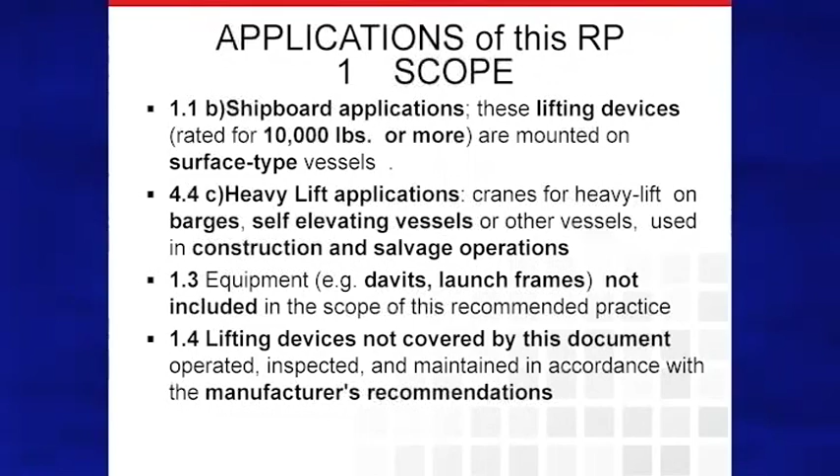We added something in there to kind of cover these actions. Lifting devices not covered by this document shall be operated, inspected, and maintained according to the manufacturer recommendations. A lot of these smaller lifting devices that people consider cranes, and we've got a definition for cranes...

They don't think you have to do an inspection on them. Well, everything needs some type of inspection. That's why the manufacturer documents are important.

We added a crane definition. There never has been a basic description of a crane. Some of the terminology was, well, it's not really a crane, it's a maintenance device. Well, a crane is any power-operated equipment that can hoist, lower, slew, or horizontally move a suspended load. So it's pretty well describing what a crane actually is.

Derate has always been in there, but we added some wording. Why do you derate something? To reduce the capacity because of damage or deterioration of a critical component. So there'd have to be a reason why you derate a crane.

So there was discussion during these years of trying to get this document in place, trying to figure out exactly when we get to words, what does it mean, why we have it in there. That's why a lot of the terms were added, but there were some descriptive terms added to it.

In service can be, as long as the crane is capable of operating in a safe manner, with the boom in the air or in the boom rest. Either way, it still can be in service. Out of service is when it's not capable of operating in a safe manner. It can be in the air or at rest, neither one, it could be either way.

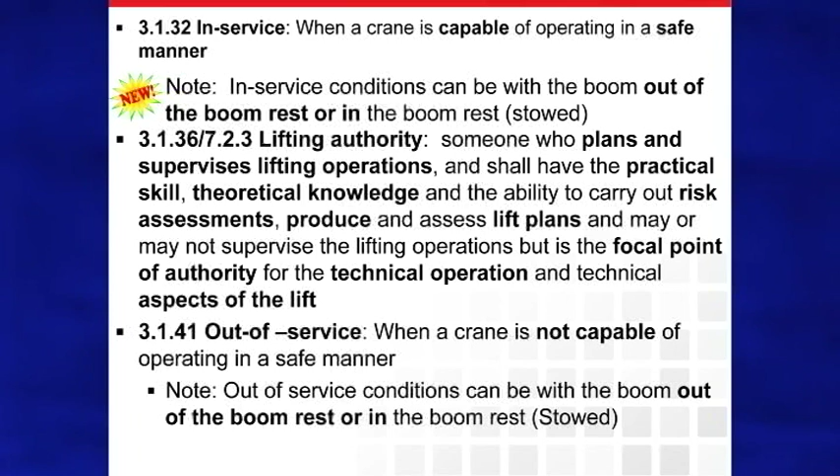Ed Zerang went through the lifting authority in his presentation, but I think it's a little bit more involved in lifting authority than people are going to realize. It's going to be a certificated person. A PIC appoints somebody as a lifting authority.

That doesn't mean that if there's an incident, who's going to determine what his qualifications are. I think there's going to be some specialized training involved in that lifting authority process. Like I say, it's in there for a reason, and I think it's going to be a boost as far as a lot of these lifts, having somebody on location, especially for the heavy lifts.

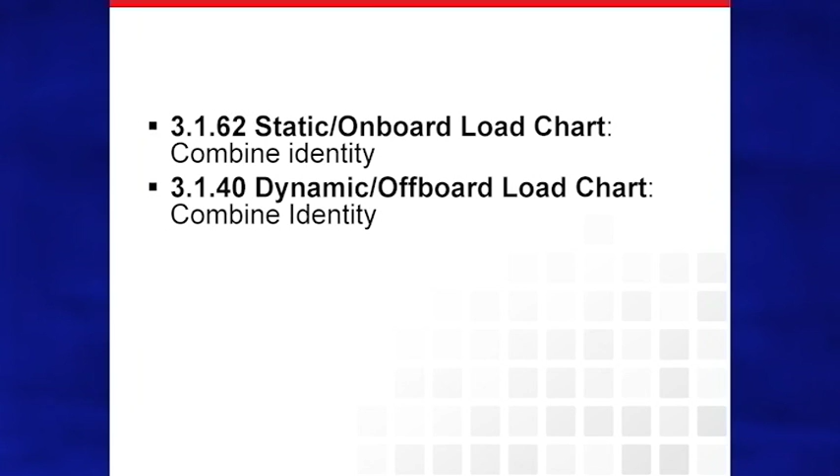Static and dynamic, all the older cranes all had static charts in them. What is it, '95, required to have a dynamic chart. Well, a lot of the old operators have some of the older cranes. Now they want onboard charts and offboard charts. Not really required until the 6th and 7th edition when you had floating vessels.

Static and dynamic is required on an older generation crane. So with that emphasis, we added static, onboard, dynamic, and offboard to kind of give us a guide. Basically, it's not always onboard and offboard that is required.

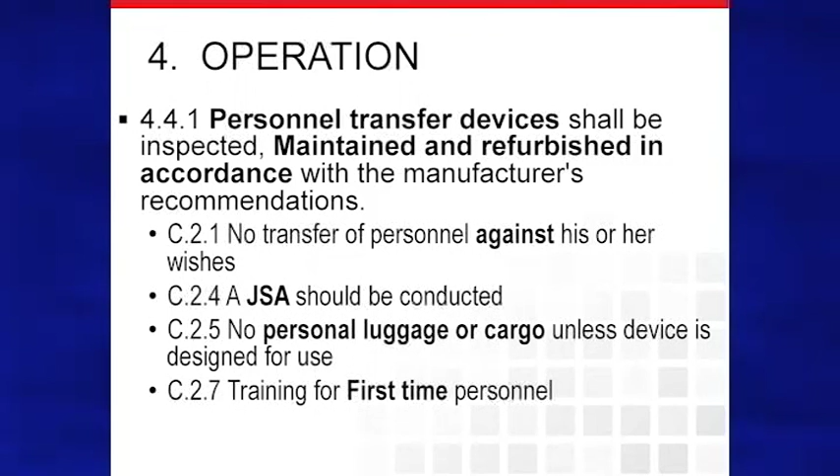C.2.4, a JSA should be conducted when doing any personnel lift. That was added basically to ensure that the person getting on that basket is on the JSA and aware of what's happening. Big topic: load test.

Presently, the only requirement by API is that it has to be on a new, relocated, or temporary crane. That's the only time a load test is required. The crane load test is not required to determine the fitness of repairs or alterations.

Some representatives that came to the meetings wanted a load test on any critical component that was replaced. Then the flag started coming up: okay, you're changing the dead end on a crane, it's a critical component, so now you have 400 cranes and you're going to do a load test on every one just because you changed the dead end. We kind of left that as, well, we're not going to go to that area.

That's up to the owner to determine if they want to do a load test. They own the crane, so they can make the call. But it's not required for a critical component.

We've had instances where you have a crane operator who's pretty sharp and knows that crane will not pass a load test. So you're sitting in the crane looking at a dyno, the operator's pulling a load, and you're trying to verify it'll hold the load. The operator is just holding the boom hoist control or the hoist control in because he knows the lift cylinder's leaking or the winch is slipping, so he can fool the inspector.

We added in there to make sure the lever's in the neutral position, just to make sure the crane will pass, not the operator passing the crane.

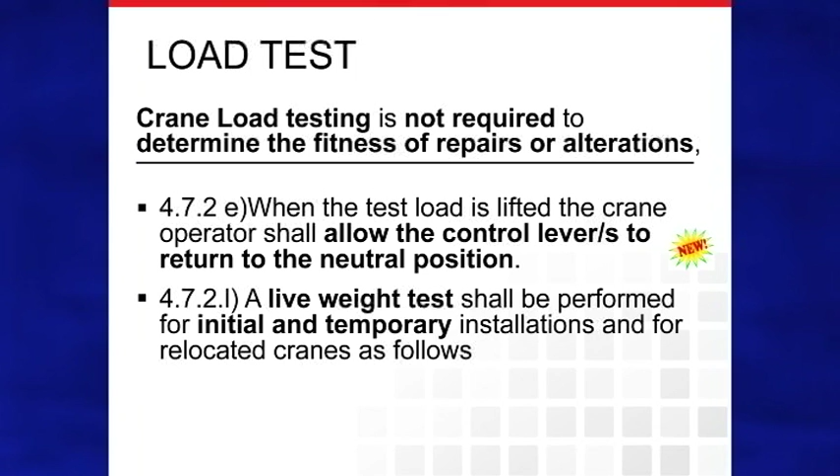On load testing, a live weight load test shall be performed on initial and temporary installations, basically water bags or steel weights, anything live weight, not deck pulling. The load should be swung in all directions that the crane is operated to avoid obstructions.

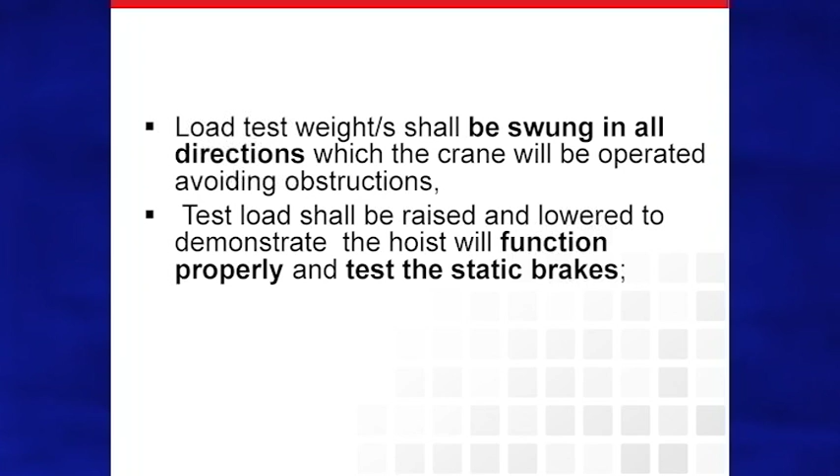Another portion is it shall be raised and lowered to demonstrate the hoist functions properly and to test the static brakes. If it can't handle the load, can't lower it, can't hoist it, can't hold the load once you go into neutral, it's not really going to pass the test.

Crane usage categories: for infrequent use, the only thing required is a pre-use and an annual inspection. Now, if it's sitting idle for more than 3 months, you have to do a monthly inspection, going through a complete full function test of the crane during that period.

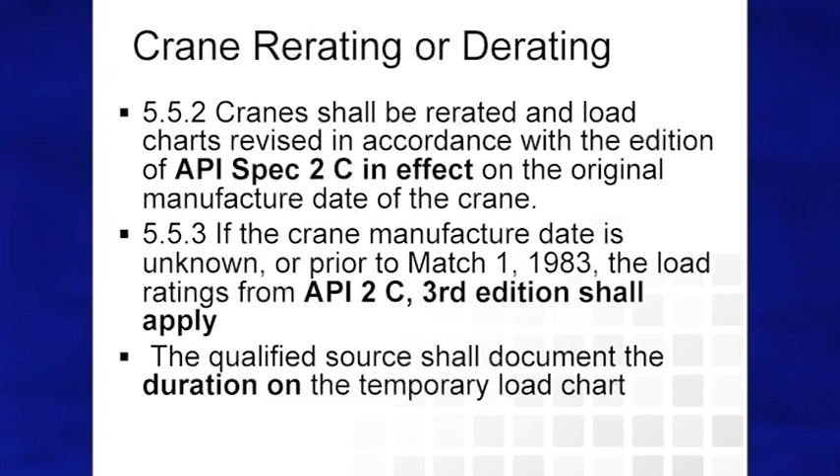Welding repairs: the crane shall be re-rated and load charts revised in accordance with the edition of API 2C in effect at the original equipment date of manufacture. So basically you don't have to go to the 7th edition for a crane you're doing repairs to. It just goes back to the edition it was designed or built to.

Whenever a derated load chart is put on a crane, it must be done by a qualified source, and there should be documentation of the duration of that chart, whether it's 30, 45, 90 days, whatever the period is, so you don't have a crane sitting there for a year with a derated load chart on it without knowing why it was derated or how long the chart is good for.

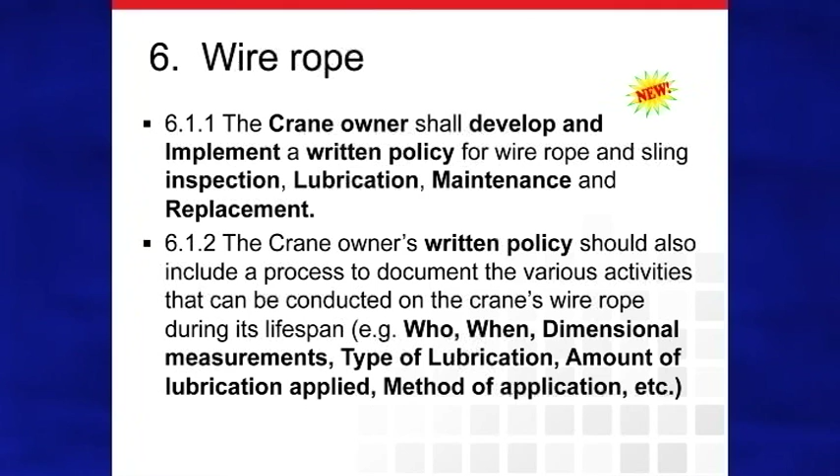What came out of it was that a crane owner shall develop and implement a written policy for wire rope and sling inspection, lubrication, maintenance, and replacement. That policy indicates who, when, the dimensional measurements, type and amount of lubrication, and the method of application. How is it being greased, how is it maintained?

Section 6 of the wire rope requirements also does not apply to rigging. The little anti-two-block cables that hold up the balls or weights are not required to have a certificate or a pull test or proof test on that sling. It's just a piece of equipment, not required to have that certificate on it.

But it shall be included as part of the periodic inspection program. A lot of people miss checking those little items, like the shackles and the cables. That's part of the inspection process.

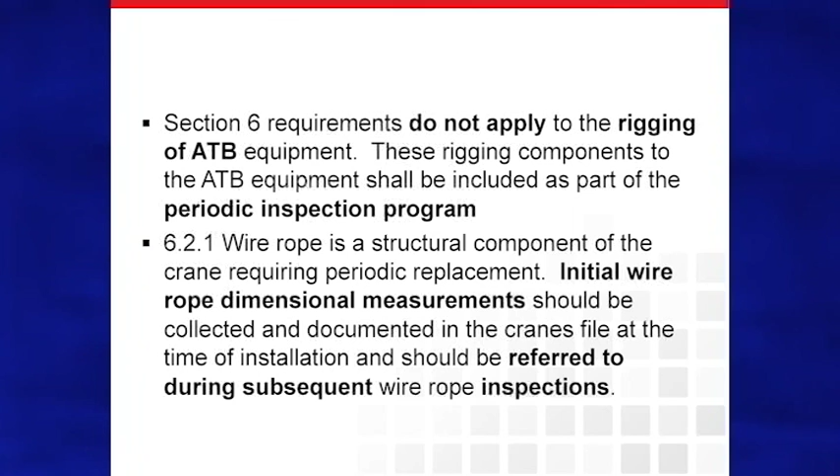Basically a baseline dimension: you put the wire on, work it a little bit, get a baseline dimension of that wire rope and document it. There's no nominal dimensions in this part for running rope or standing rope procedure. We don't measure 0.750, we measure the actual dimension and record that. No nominal dimensions — we took out Appendix D.

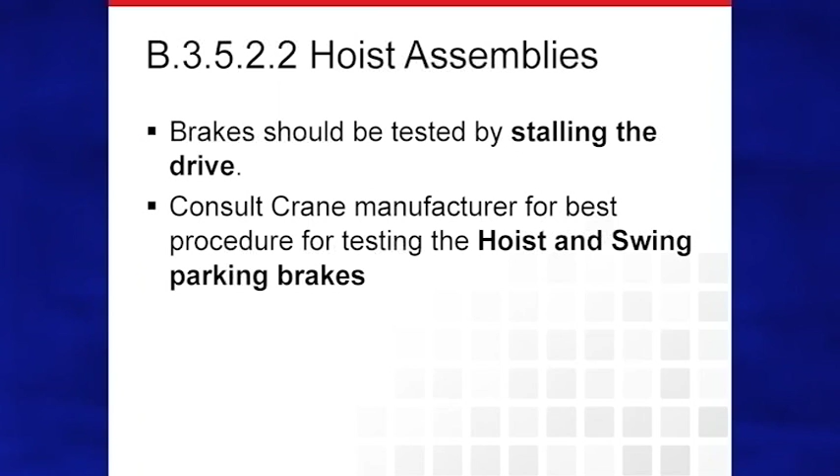Annex B covers hoist assemblies. Part of it was for stalling the hoist drive; we took that part out and added to consult the crane manufacturer for the best procedure for testing the hoist and the swing parking brakes. The swing brake was already in there before, but we added details on the swing brake, since a lot of people don't understand how to check a swing brake.

They want to swing it and hit the brake. Oh yeah, it works. But next time you're getting a wind, put the brake on and it doesn't hold. You have to actually power against a stalled brake to test it. It's the only way you can get a true test on the brake. If it tears up, it's junk. To test it properly, it has to be stalled out against that brake.

Some more on wire rope. We added high stranding to the terminology for high strand on wire rope. Basically, people understand that there's an issue with high stranding. That whole high strand is not actually working. It's a dead rope. All the dimensions on the wire rope for wear limitations all stay the same.

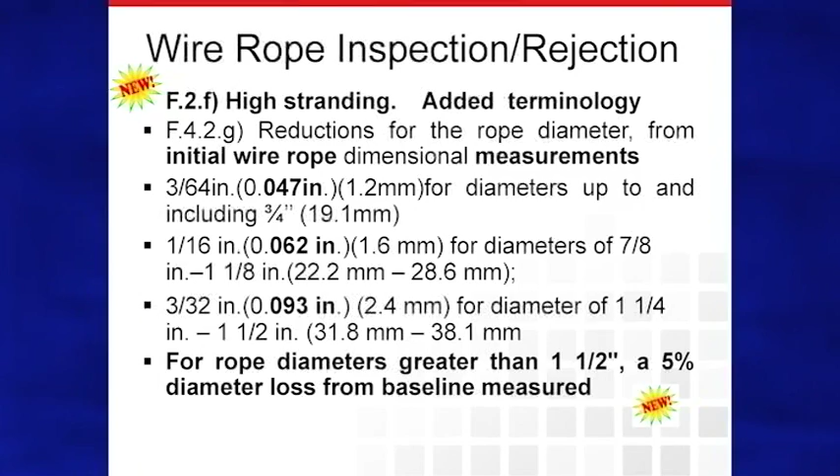The wire rope terminations in '95 changed it to where you don't have to saddle a dead horse anymore. Well, that was always our terminology — you don't saddle a dead horse. Well, it's back in now. Where all this part of it here, you can saddle a dead horse. You can do it either way. So that whole process, this wasn't in there before. We added that back in, so you can saddle a dead horse now.

Pre-use inspection — in the previous documents, I think the 5th and 6th edition both, item number 6 was to do a walk-around inspection. Most people set up their inspection criteria as far as pre-use according to the document, basically A, B, C, and D. We took the walk-around inspection and performed it up to the top, because most people, when they get on the crane, they're not getting back off to do a pre-use inspection and walk-around. So we thought that should be put up top, so that you do that pre-use first. That's the first thing you do before you get on the crane.

We also added in there to verify the operation of the boom hoist and anti-two-block. That wasn't in the pre-use inspection for years, it was in there for the quarterly inspection. So if you have an infrequent use category, less than 10 hours per month based on a quarterly average, it never was done until you did the annual. So in theory, it wasn't required to check the anti-two-block or the boom hoist kickout. We wanted it in there.

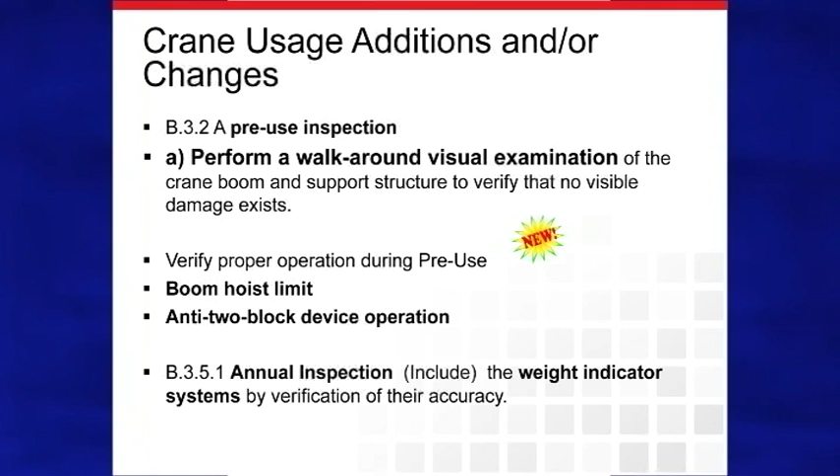We added in the annual inspection to include the weight indicator system for verification. It's not required per API that you have a load indicating system on a crane, but if you do have it, verify it — do the increments, basically 5, 10, 15, 20,000 pounds — and compare it with a calibrated dynamometer to make sure that load indicating system is working. I don't know anybody that's going to send in a Martin Decker unit every year to get it recalibrated. Basically, the only time they do it is if it starts leaking. Check it occasionally, make sure that the function is there, that it does operate in some manner, in increments.

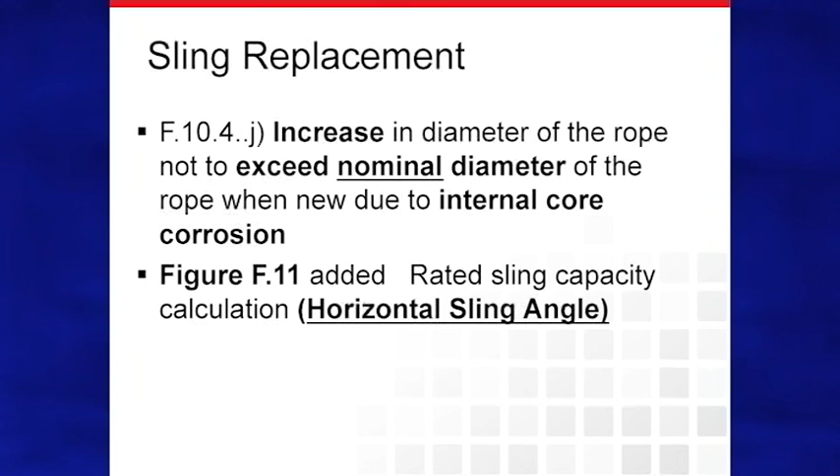Here's nominal diameter again. Nominal diameters did not show up on running ropes. The only time it's in the document is for slings, and that's just to verify if they have an increase in diameter — we back up on wire rope. There's no statement in there on running ropes that if the wire rope increases you have a warning sign. I think we still think people, as a qualified inspector, should have enough common sense to realize that when stuff starts getting bigger, something's not right. Whereas a sling, you can kind of bend it around — if it stays in one position, you know it's junk.

Yesterday, one of the guys from BSEE made a statement about ownership, and I think that's one of the biggest things — people do not take ownership anymore in the practice of operation, rigging, inspection. People just want to pencil-whip an inspection. The ownership part, I think, is the big thing I needed to bring up earlier but didn't. It's probably one of the things people should understand — ownership is an important part, that people understand they are responsible. Thank you.

Next up is David Landry, presenting on temporary cranes from API RP2D, covering changes from the 6th to the 7th edition. David is a crane foreman, employed with Fieldwood Energy LLC, and has been working in the offshore oil industry since 1975. We're going to talk about the changes between API RP2D 6th edition and 7th edition for temporary cranes.

Temporary crane installation. The temporary crane section has gained some major additions. Previously, this section was Appendix I, and it was a half a page long. This section is no longer an appendix. It is now chapter or section 9 of the RP2D 7th edition, and is now 5+ pages.

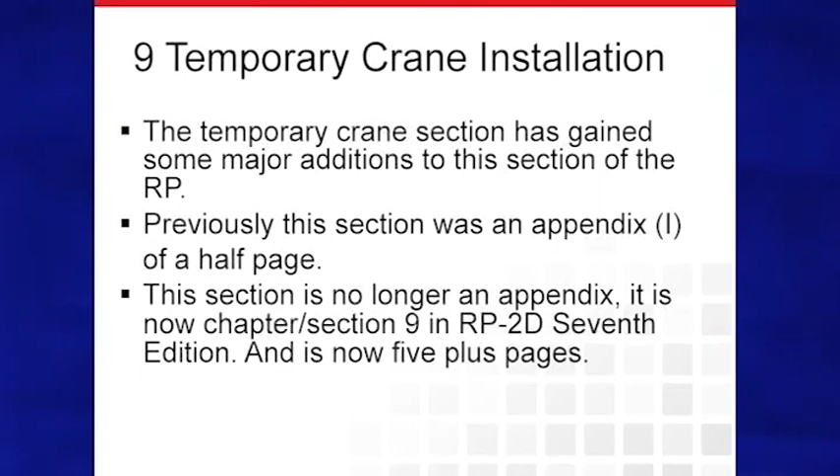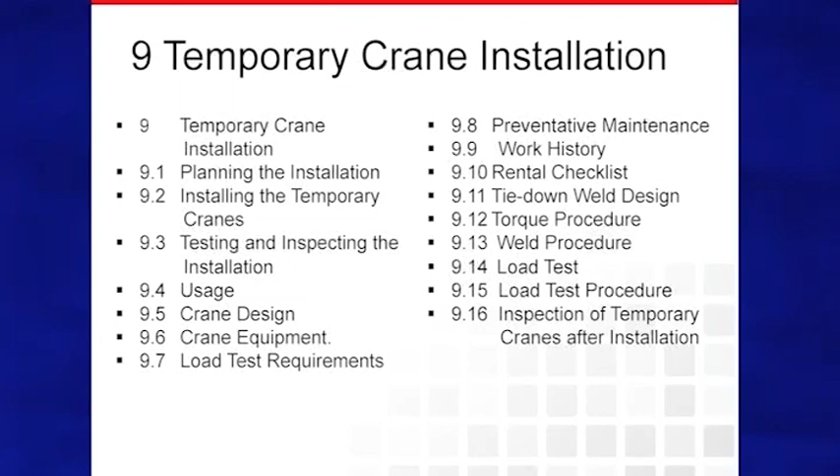All the sections in the temporary crane installation cover planning the installation, installing the temporary cranes, testing and inspecting the installation, usage, crane design, crane equipment, load test requirements, preventive maintenance, work history, rental checklist, tie-down weld design, torque procedure, load test procedures, and inspection of temporary cranes after installation.

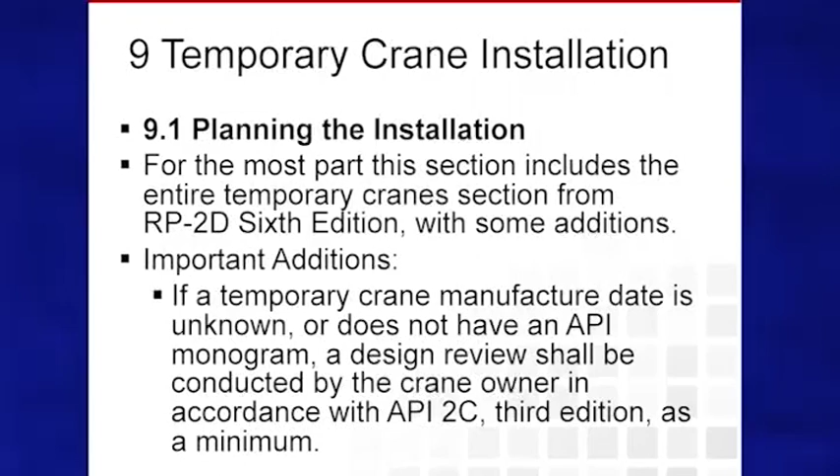Planning the installation. For the most part, this section includes the entire temporary crane section from RP2D 6th edition with some additions. An important addition: if the temporary crane manufacture date is unknown or does not have an API monogram, a design review shall be conducted by the crane owner in accordance with API 2C 3rd edition as a minimum. The qualified person shall ensure adequate review of the following: platform design and condition, selection of the temporary crane, planned crane placement on the platform, crane base beams and sub-base beams and tie-down design, meeting the safe working loads for the crane being installed, and critical components as defined in API 2C.

9.2 in the 7th edition has no changes from the 6th. It's virtually the same, no changes, and also 9.3 testing, inspection, installation.

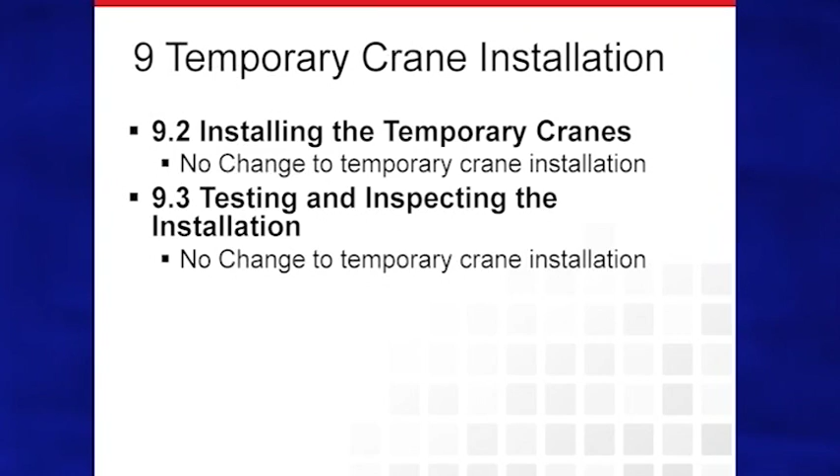The following are additions to the temporary crane section in RP2D 7th edition: usage and crane design. Temporary cranes are frequently used for construction, maintenance, and/or for installing equipment that the platform crane may be incapable of. They are not the permanent crane. Their fitness for purpose is more specifically identified by the task they are mobilized to address.

The load rating should meet the criteria as described in the edition of API 2C in effect on the original manufacture date of the temporary crane.

Crane design. The provider should submit, if requested, documentation of design parameters for the crane, including what the crane was designed and manufactured to. The crane pedestal substructure, base beams, and all crane tie-down connections should be designed in accordance with API 2A WSD. The provider should submit construction details for the substructure, base beam, substructure-to-base-beam connections, and base beam tie-down design for the crane, and certify that such design is performed by a qualified person and is specific to the setup of the proposed crane at the proposed platform.

Crane equipment. All cranes shall have anti-two-block devices on main and auxiliary lines. The crane shall be equipped with boom high-angle limiting devices. The crane shall have a load indicator.

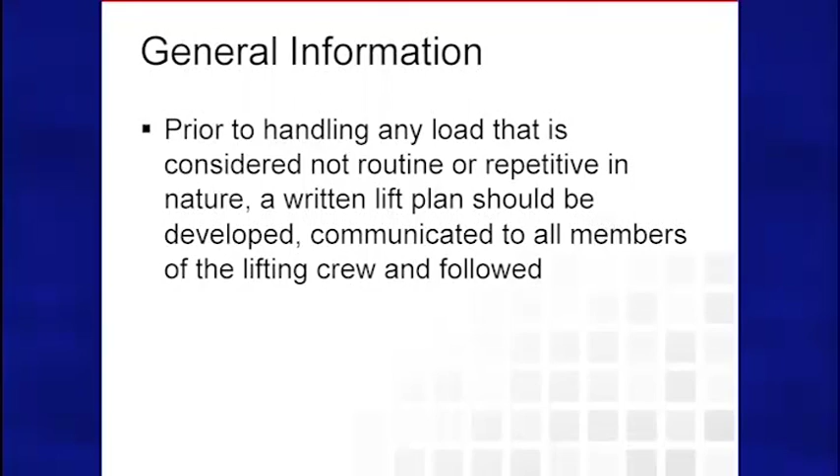It starts off here where prior to handling any load that's considered non-routine or repetitive in nature, a written lift plan should be developed, communicated to all members of the lifting crew, and followed. Hear the word communicated to all members.

We've seen that in rigger incidents and accidents - crane operator incident accidents. It's a team that takes the full responsibility, because the team has failed if one accident happens amongst the team. So think about the team concept as we go through this.

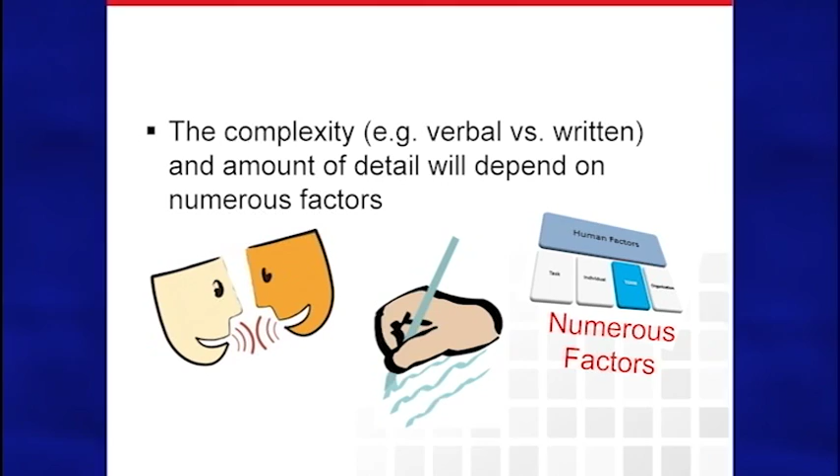The complexity, for example verbal versus written - the amount of detail will depend on numerous factors. And of course human factors is one of the big ones. What's that person's knowledge, experience? What is his demeanor, how he acts? Another thing we don't think about is that we are global - we can have language barriers, which could be a problem. So think about all the numerous factors here.

If a rigger's out there, he's the lowest man. He's looking up to the crane operator or people above for leadership. He's looking for help. We should be providing it to him and giving him the mentorship that he deserves to have, during the operation and after the operation. And don't forget, at any time during these operations, he has the power to do what? Stop, without any repercussion.

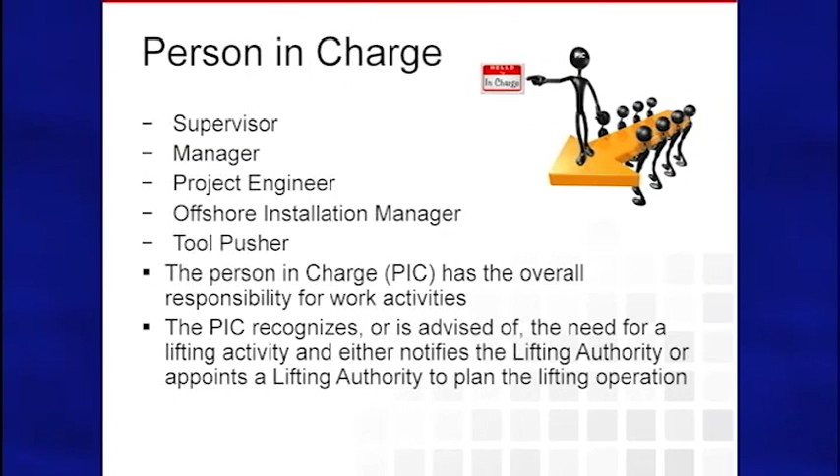Person in charge, who can it be? Well, supervisors, managers, offshore installation managers, tool pushers. But the person in charge has the overall responsibility of the work activities. The person recognizes or is advised of the need for a lifting activity, either notifies the lifting authority, which we're going to cover here in a few minutes, who that person is. He'll appoint the lifting authority to plan the lifting operation. So you see we're starting to get some kind of procedure or process here.

Here we're going to talk about the lifting authority, what his responsibility or what he should be doing. He supervises lifting operations. He should have practical skills, theoretical knowledge, ability to carry out risk assessment, produce and assess lift plans, conduct pre-lift meetings or toolbox talks.

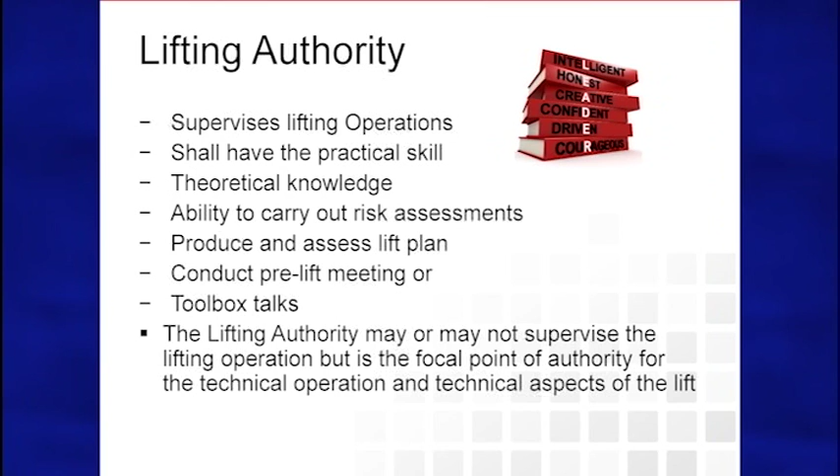The lifting authority may or may not supervise the lifting operation, but he's the focal point of the lift, the technical operation. He's the focal point.

Examples of the lift team could be tech support, giving you technical information to perform the lift, like put this sling right here on this pad eye and this pad eye. There might be specific areas you might have to attach to do a lift to keep it balanced. Crane operator, vessel captain, rigger.

To plan the lift, we got to take into consideration lift categorization, which I'll go into more detail as we go further. The lift categorization has to be determined: is it a heavy lift, or is it a simple lift? Is it complex? Is it critical?

Some people might look at personnel lift as being critical because it's involving personnel. We can hurt somebody. Risk assessments, training and competent personnel. Do we have trained and competent personnel to perform this task?

At some points, you got to provide training. And somebody's going to come in as an SSE, short service employee. When he comes in as an SSE, should we identify that person as not having knowledge? So maybe he might be an observer at this task, because we got to get him trained eventually. We got to get him up that ladder to be experienced.

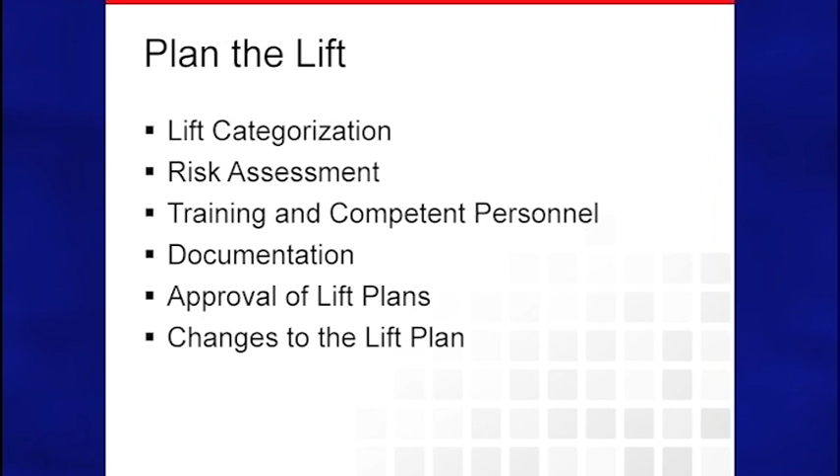Changes to the lift plan. Is he going to make any kind of changes to the lift plan? And sometimes if you make a change to the lift plan, it has to be done all over again, and it has to be communicated all over again.

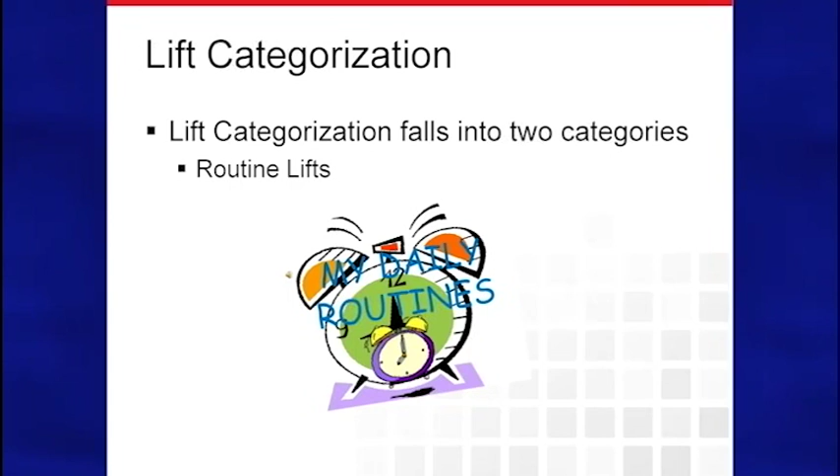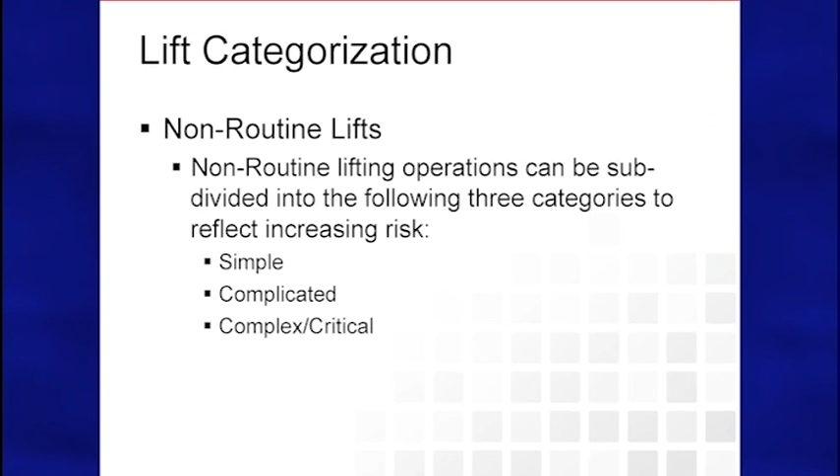Lift categorization is going to fall into two categories: routine lifts, and it's getting to the point where what is routine, and non-routine lifts. Non-routine lifts can be divided into three other categories: simple, complicated, complex, and critical. Each category requires a different level of documentation and control based on complexity and potential severity.

We're going to get to a section called Appendix G or Annex G, which in the back of API RP2D, will aid you or help you to identify different categories and these types of lifts.

You already might have a plan that categorizes, you might have different terminology. That's all right, it's acceptable, as long as it shows increased risk, increased documentation, and increased skills.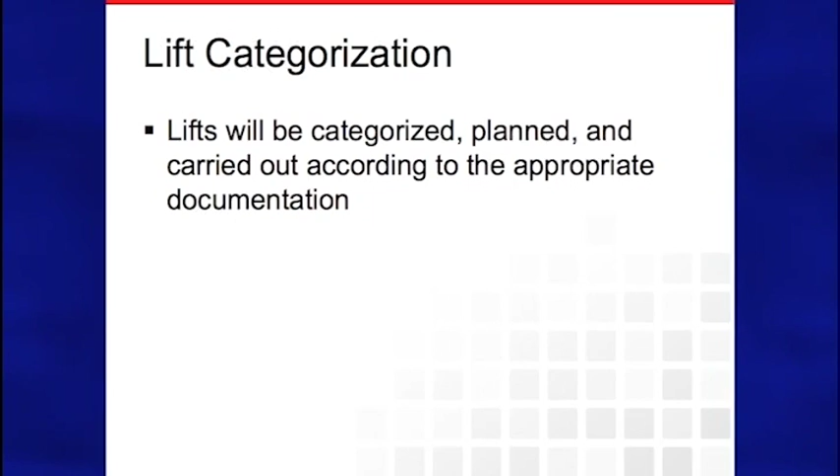The lift will be categorized, planned, and carried out according to appropriate documentation. Again, the documentation, like a permit to work, JSA, is required. This is what the Annex G I was talking about describes, some typical categories of lifting operation according to the level of risk and complexity.

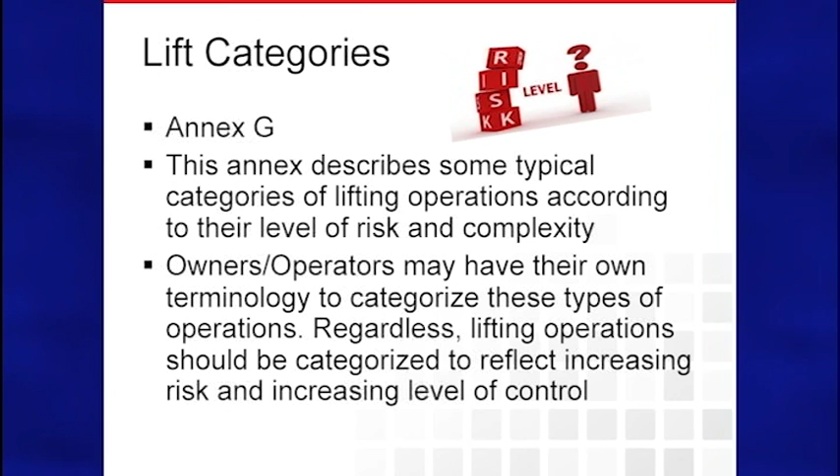The owners and operator may have their own terminology, as I mentioned earlier. That's fine, as long as it reflects increasing risk and increasing level of control.

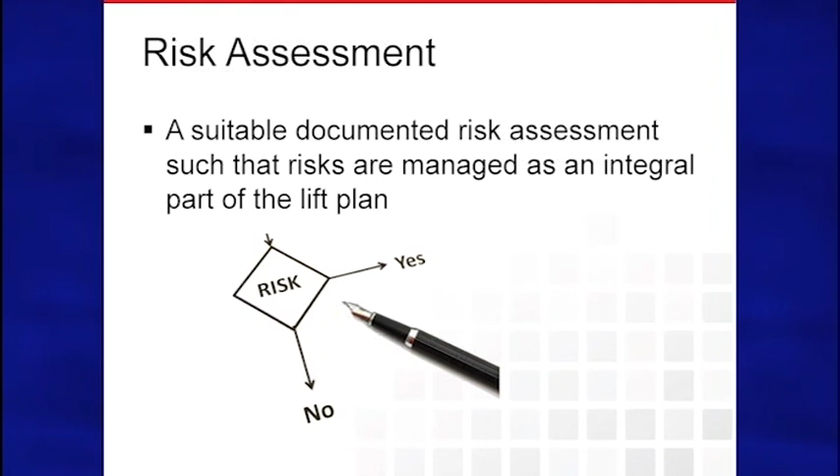Risk assessment: every lifting operation should be risk assessed by the lifting authority before work begins. The lifting authority should ensure that appropriate controls are in place for those hazards identified in the written assessment, such that risks are managed as an integral part of a lift plan. Remember, he's got to identify all the risks involved, right? Suitable risk documentation, risk assessment, such that risks are managed as an integral part of a lift plan.

A suitable documented risk assessment may already exist. You might have already developed a plan, and it's called generic, but that doesn't mean you just keep using the generic over and over again. It should be reevaluated for its applicability.

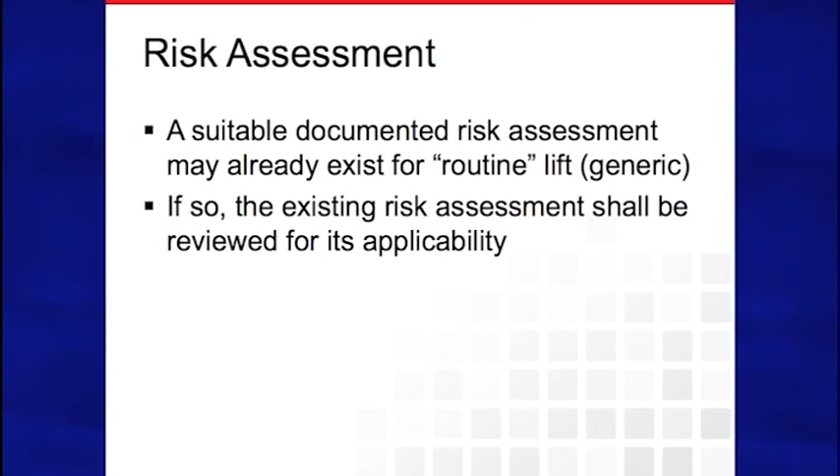You have to look at it and say, well, maybe the weather has changed. Maybe because I got a crew working over there, now I got to communicate with that crew, letting them know there's a lift path. That was mentioned earlier, wasn't it? Lift path is part of your lift plan. Are we going to be over any environmental concerns?

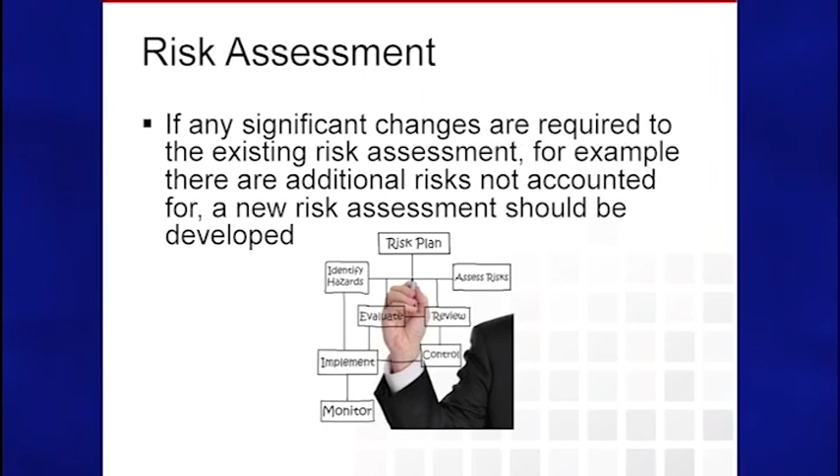Are we going to hit something, bump something? Are we lifting over personnel? If any significant changes are required to the existing assessment, for example there are additional risks not accounted for, a new risk assessment should be developed.

So if somebody might come out the blue and say, hey, we forgot this, then what do we got to do? Another risk lift plan assessment all over again.

This is a little example here: a crane operator while transferring personnel between vessels and vessels to the platform shall raise the personnel carrier only high enough off the deck to clear all obstructions. He's going to swing the personnel carrier over the water, raise and lower in such a manner to minimize swings, position it slightly above the landing, and gently lower to the deck.

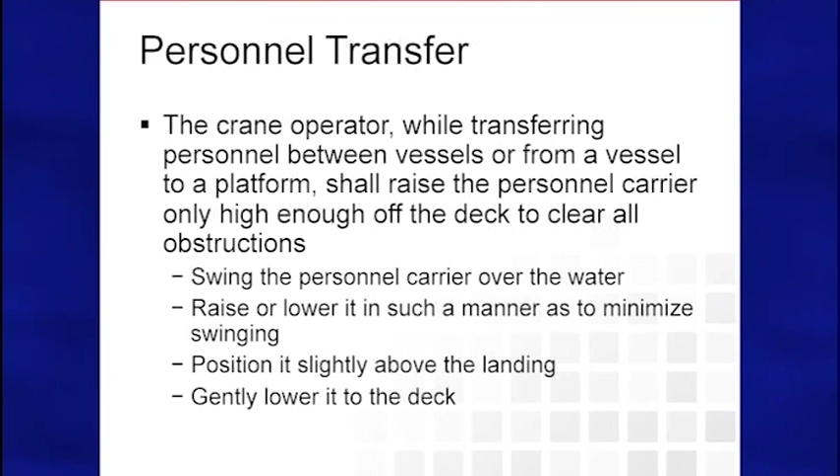Well, that's giving you some steps, huh? Can we add to that? Well, certainly, because your policy might have more to it. Regulatory might have more, whatever. The manufacturer might have something to add to that process. All this has to be put together to make your lift plan.

Owners and operators should identify the standards required for critical roles and process for establishing and verifying qualifications of those involved in planning and executing the lift operation. So we're looking at personnel qualification now.

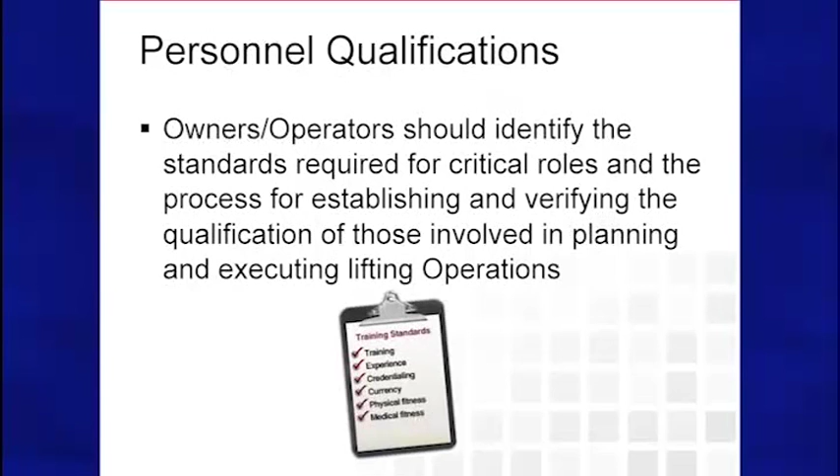Let's say that I fill out a logbook, I'm just picking that, okay? And I say, well, as long as he does 70% of it, that's good enough, we got a good understanding. But the other 30%, he has not performed yet. You better know what that 30% is, because if you put him on a task that's on that 30% that he's not performed yet, remember, he has not done it. And if something happens, that will come back to say he has not performed that task.

Personnel carriers should be designed and in conditions suitable for the intended purpose and maintained and inspected according to the manufacturer specifications. Also see Annex C, informative. That's, in other words, giving you more information for additional information on personnel transfer.

Qualified personnel to facilitate training, records should be readily available, if practical, on the person. That's a lot of documentation, huh? Only qualified personnel is involved in lifting operation. We got to train. He's an SSE.

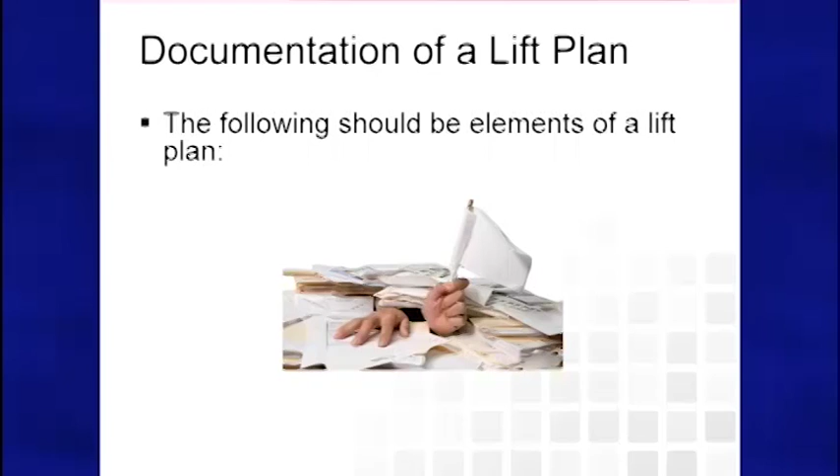Think about that, the following should be elements of a lift plan. You got to have a written plan, a lift plan, huh? You got to have a safety checklist. You know, what are you going to check off? Now, I didn't cover everything in the API RP2D, but there's a lot, 30, 40 items there to check through to see if everything is correct.

Remember, it's a team. I hope the crane operator is doing his job. I hope the PIC is doing his job. The lift plan, the rigger knows his job, because all of us is working as a unit.

Drawings, risk assessment, JSAs is all part of the lift planning. Drawings, like, you know, is there environmental considerations have to be taken into consideration when the load is going from one location, say point A to point Z? What environmental catastrophe can happen? Is there something we can hit or disrupt? Is there people in the way? Is the crane in working condition, huh?

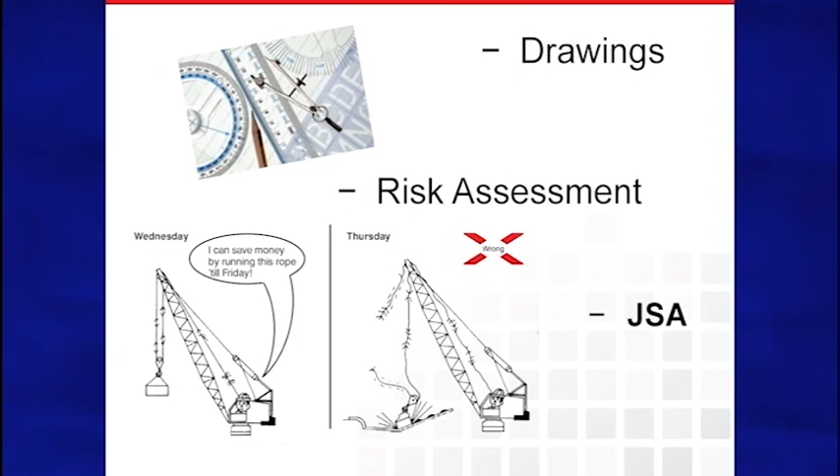Toolbox talk, communications, and permit to work. Toolbox talks, you can call it a safety meeting or whatever you want to call it there.

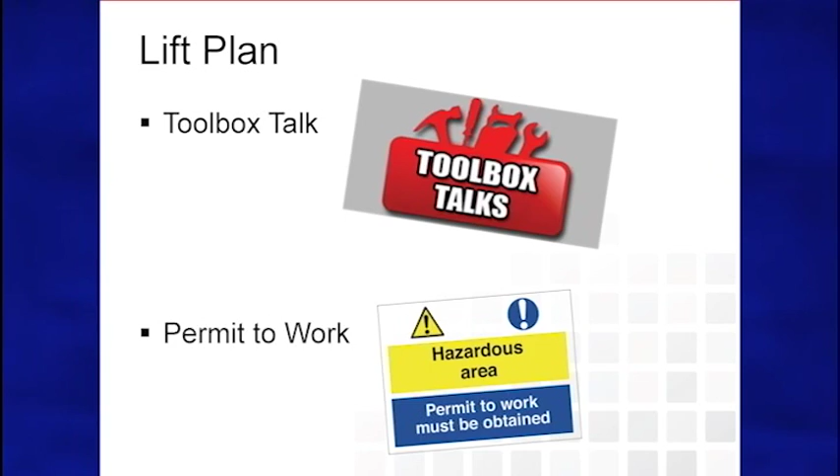All lift plans should be reviewed and approved by lifting authority. The rigor of the review should be determined by the category of the lift, which can require engineering specialists. So we're going to get approval or disapproval, and it might require more engineering input. Is there any changes to the plan? You know what changes do, it just kills us all. We don't like changes, nobody likes changes.

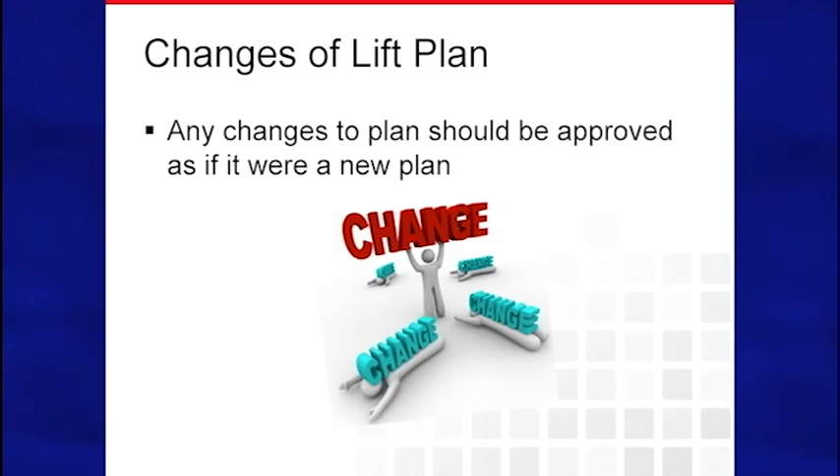Some questions you can ask: Is there a new existing plan which is adequate for the lifting operation? Has a risk assessment been undertaken and the risk managed through the control measures within the lift plan? Is equipment selected fit for purpose and identified in the lift plan? Do personnel selected to undertake this lifting operation have the correct level of experience and competency? Got to make sure of that.

Has the steps of the lift plan been communicated and understood by all involved? Again, the team—what could go wrong? Have you thought of everything? Have you conveyed that information? And has it been put into your lift plan?

What can go wrong? And if something goes wrong, do you have an emergency plan? Do you have an emergency escape route? All that goes into your lift plan.

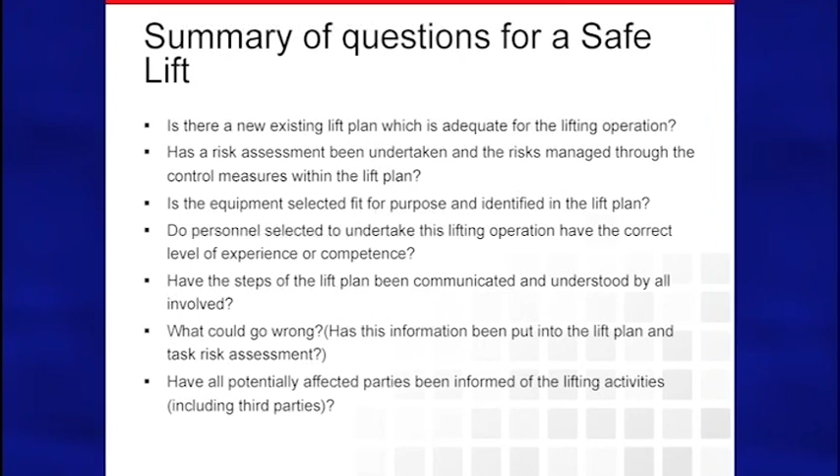Has all the potential affected parties been informed of the lifting activities? That means everybody. Because when you have a lot of activities going on, a lot of companies coming in doing jobs, they're all over the place like busy bees. Are we going to affect each other or get in the way of each other?

So you got to communicate all that to them. So in the end here, I like to say, we have too much to do to sit on the sideline. Let's do it together. We heard what we have to do. We've seen what we need to do. Now is the time to do it. And together we can do it. Remember, change and growth takes place when a person dares to become involved.

Thank you. Next up is Brandon Bollinger, speaking on the new API RP 2D training requirements. Brandon is president of Gulf Crane Services and has 25 years of professional experience in the offshore industry.

As everybody knows, the API 2D took about 5 years to write. The 7th edition from the 6th edition, we started it, and we had about 4 to 5 subcommittees, and I happened to end up taking over the training. So we're going to get straight into the slides.

The 6th edition has approximately 4 pages of training information and requirements. Currently, the 7th edition has 30-plus pages of information and training requirements. And that was a major difference, of course, and I'm going to break down some of those differences as we go.

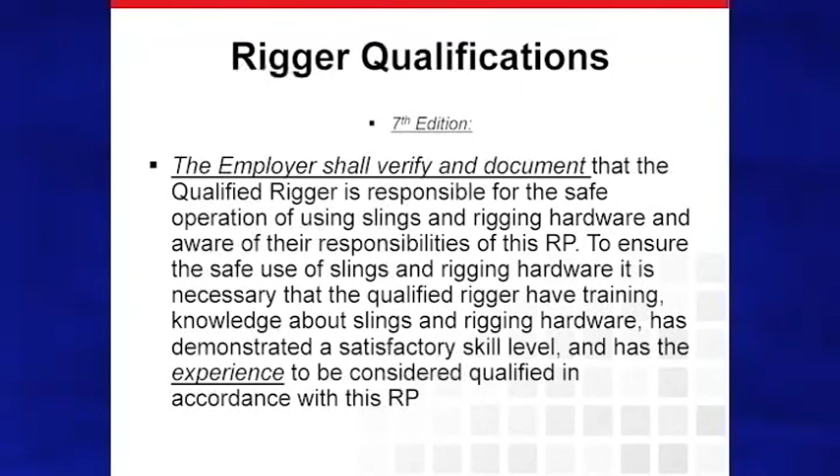Rigger qualifications: the employer shall verify and document the qualified rigger is responsible for the safe operation of using slings and rigging hardware and aware of their responsibilities of this RP. To ensure the safe use of slings and rigging hardware, it is necessary that the qualified rigger have training, knowledge about slings and rigging hardware, has demonstrated a satisfactory skill level, and has the experience to be considered qualified in accordance with this RP. These were some notables that stayed the same.

The crane load rigging shall only be performed by a qualified rigger. The employer shall ensure that rigger qualifications are maintained a minimum of every 4 years. We did discuss that in deep detail—could we do a 2-year refresher? We stayed with the 4 years on that issue.

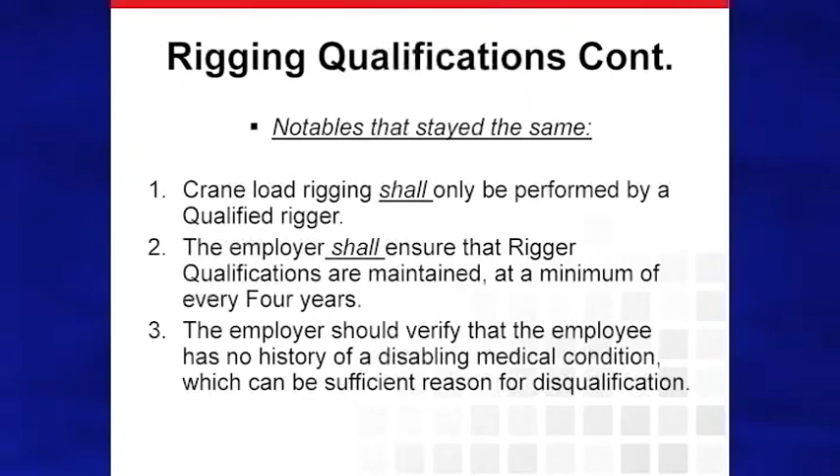The employer should verify that the employee has no history of disabling medical condition, which can be sufficient reason for disqualification. A lot of issues around that as well, and of course we left that up to the employer to be responsible for. That's not something the training company had to do, but the employer had to be responsible for that. Rigger training assessment.

The rigger hands-on assessment is added to ensure the competence and qualification of the employee, going from 1 page of requirements to 14.

Where we saw the biggest issue, of course, was we only had 3 pages, so there wasn't a lot to go by, and there were many people involved in this, Ed Zerang and several others who had been even working on the IADC, and so they had kind of started tasks, and I'm going to show y'all some of those here in the slides to come. So the rigger ended up having tasks that we added in, and I gave an idea of what the tasks looked like.

Task 1, pre-lifting hardware and sling inspection. Wire rope slings, complete inspection, 5 steps. Synthetic slings, 5 steps. Shackles, complete inspection, 5 steps. Hook complete inspection. Load block complete inspection. This has changed from the 6th edition due to each step being a pass or fail checklist, and this is in the 7th edition.

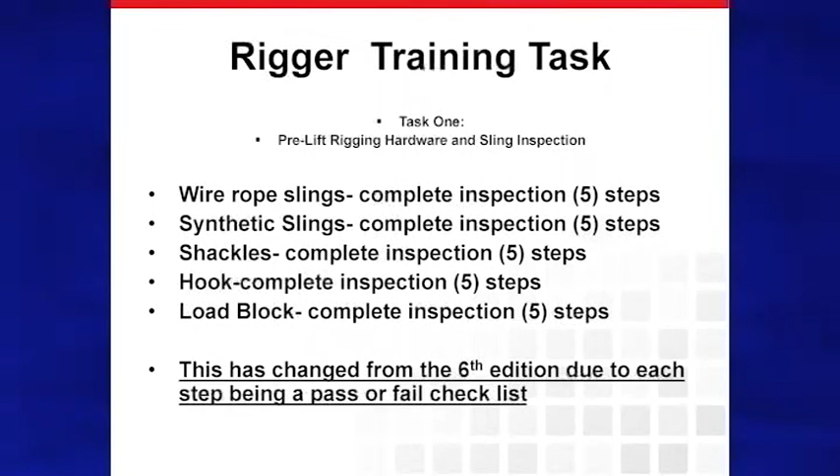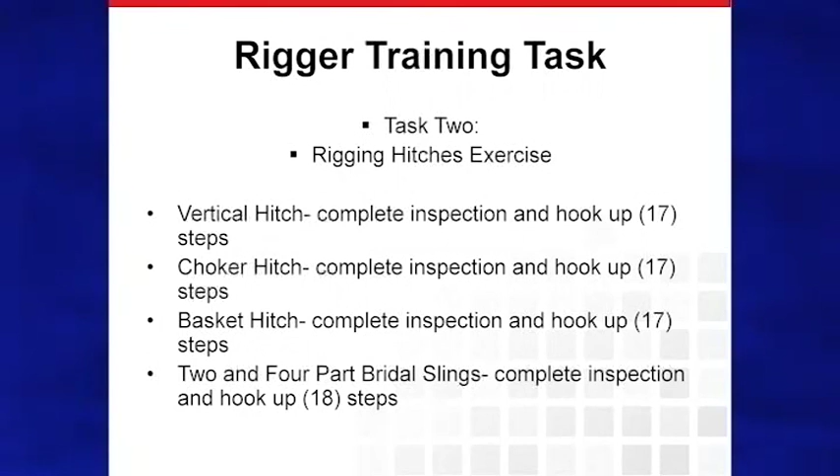Task 3: there's a lot of discussion around how the rigger communicates to the crane operator. We talked about hand signals, radio optional. We had looked at even making radio something that was required, but we left it optional. The designated signal person shall have the opportunity at the start of this task to discuss any special hand signals. One thing we also did—if there was not a boom retract or scope in or out that had been taken out, we added that back into the hand signals.

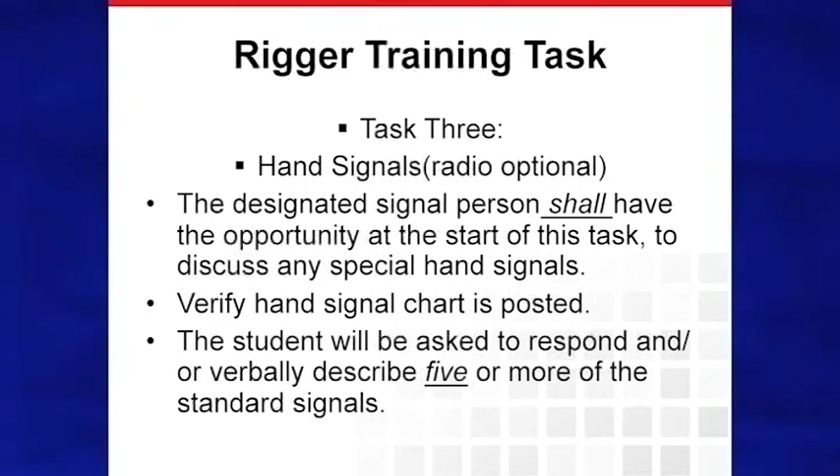Verify the hand signal chart is posted—again, that's supposed to be posted on the crane. The student will be asked to respond or verbally describe 5 or more of these standard signals. That was some kind of a minimum.

There were some questions about the certificate, because we mentioned certificate and card but did not put a copy of the certificate or show what it should look like. But if you take the same content that would be on the card, you could make a certificate the same way. So we did mention that in 2D, but we did not show an example of the certificate, just the card, in case that was a question for somebody.

Now, crane operator training, definition of a qualified crane operator. A qualified crane operator is one who is so designated by the employer, who has appropriate offshore experience and training. Such appropriate experience and training must comprise minimum amounts of classroom type and field training on cranes specific to the types of crane to be operated by the qualified operator.

I'm going to show you a couple slides that talk about different types of cranes. It was mentioned in some of the older editions, mentioning mechanical cranes and electrical cranes, but it was never specific that you had to be trained on the type of crane. So we did change that as well in the 7th edition from the 6th.

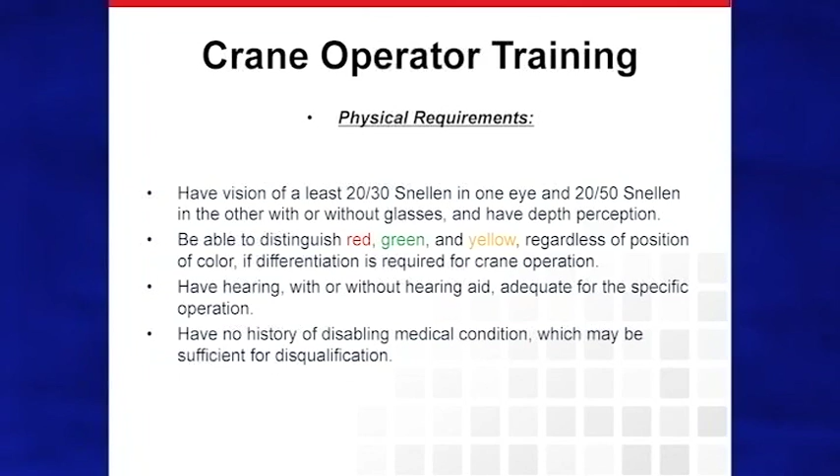We also added, which I'll show you when we get to the card, whether they need eyeglasses to be able to operate, because we felt like that was kind of being slipped by - we didn't know if a guy needed eyeglasses or not.

There was a lot of discussion around how do you check, how do you verify that all these physical requirements are met. Again, it's up to the employer to verify that this is done. It's up to the operator to have something in place to verify that the employer is doing the physical requirements. A lot of discussion around that.

Notice it stayed the same: no one other than a qualified operator should operate the crane. The employer shall assure the crane operator qualifications are maintained at a minimum of 4 years through requalification, and this shall also include current vision and medical.

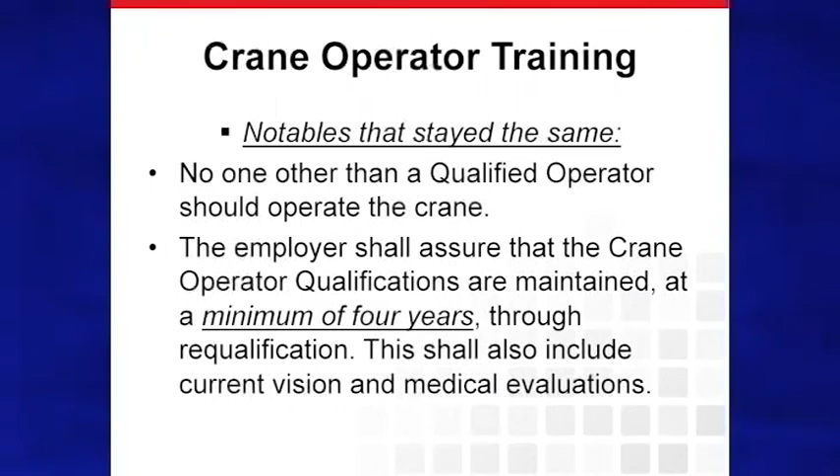Again, like the rigger, we had several people pitch whether we should go to 2-year requalifications on crane operators or riggers. The group decided that we were going to stay at 4 years, meaning that if you go through crane operator training, you have to get it done every 4 years.

According to 2D, crane operator training on types of crane - this RP shall be followed to qualify a crane operator for either 2 crane types and/or subtypes. Operation of a non-mechanical crane, which we considered hydraulic or electric. Hands-on proficiency is the last segment of crane operator training; it should be held on a similar type of crane to be operated.

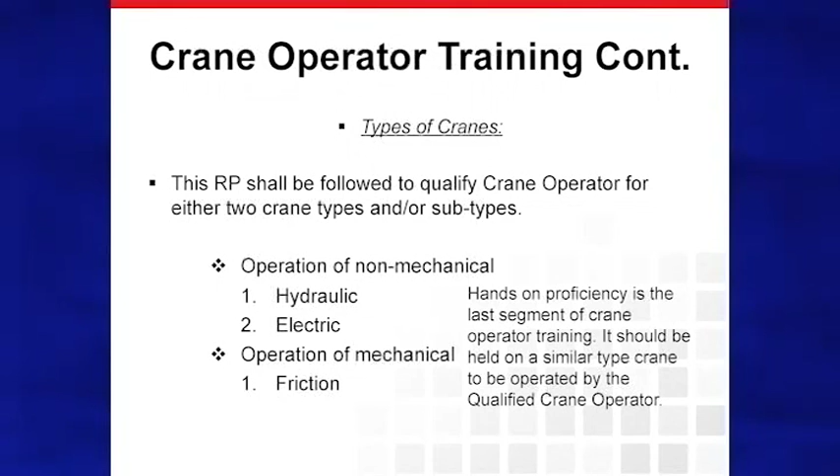The other type of crane was a mechanical or friction crane. There are still several friction cranes in the Gulf of Mexico, so it had to be specific to the type, whether it be a Manitowoc, a Link-Belt, or a unit crane. Same with the electrical, you had to be specific. So this was a lot of question around how are you going to do that.

Well, you can't train on the crane if you don't have that crane to be able to do the hands-on. So that gets a little difficult in a company that may just have a hydraulic crane trying to do electrical crane training.

You're going to have to be specific to the type of crane. So crane operator training continues with mechanical or non-mechanical cranes to be operated. Necessary experience and training shall be focused on each type of crane, and shall be more intense for mechanical than non-mechanical.

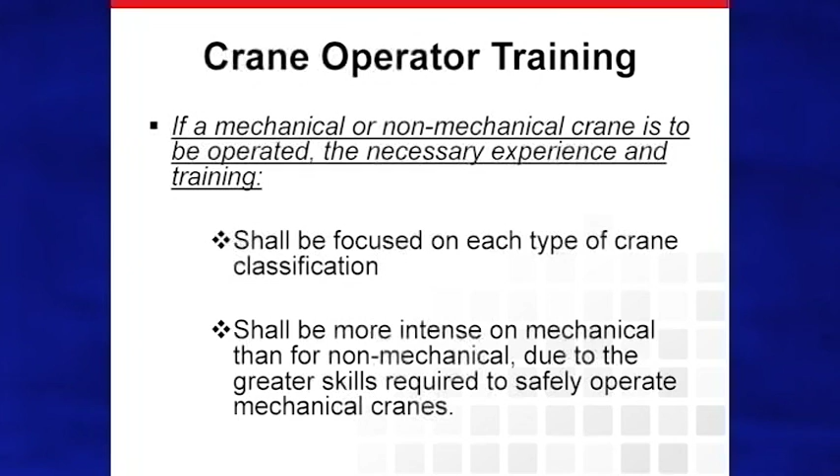Due to the greater skills required to safely operate mechanical cranes. We've seen accidents in the past tied to people operating mechanical cranes with friction, swings, clutches, and a lot of those cranes have been replaced. But there are still a good many Link-Belts and unit cranes, and Manitowocs out there that we're aware of. So pre-use and training shall document and ensure practical exercises include pre-use inspection, swing the crane and control the load, performance of at least 3 unique types of lifts.

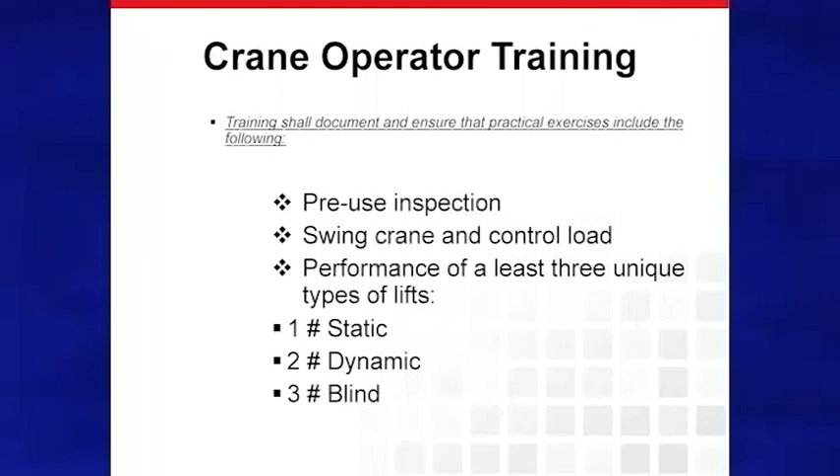There was a lot of discussion around this, that they had to perform a static lift, a dynamic lift, and a blind lift. Now, questions on that - if you're not on a floating vessel, how do you do a dynamic lift? We were specific that you needed to be able to understand that on the load chart. There could be a lot of questions about why we put it in there. Well, because you need to understand the difference between a static, a dynamic, and a blind lift. Blind lift is very simple, but there were a lot of questions around that. It is portrayed to mean that you have a way during the class to differentiate the two types, static and dynamic, meaning onboard or offboard as well.

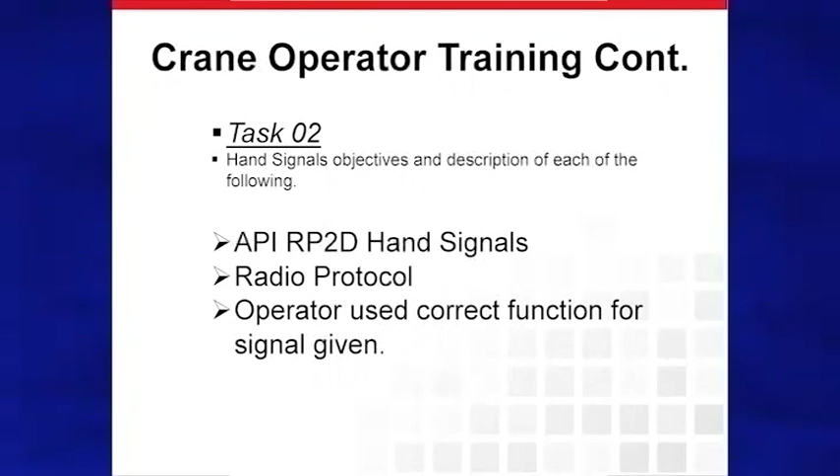So the same thing - Task 1 on crane operator training. This task should be completed in order to pass. Any student not performing this portion of the test constitutes failure of the course. Each student will do a full walk around the crane, checking for deficiencies. Task 2 talks about hand signals and radio protocol - operator uses correct function for signal given. Again, we didn't list all the tasks, I just gave you a few examples of what the tasks were.

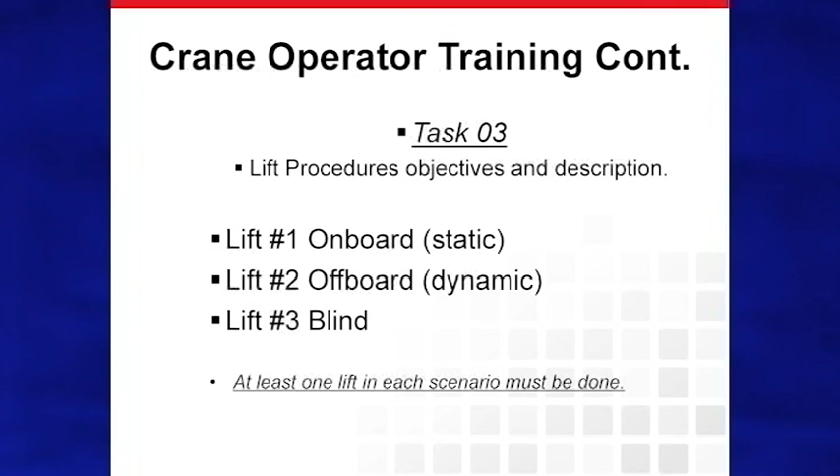Task 3, just like I talked about earlier - do you know the difference between an onboard static lift, or an offboard dynamic lift? And then they would actually perform a blind lift. At least one lift in each scenario must be done, meaning they would have to know how to use the load chart to do it, or perform a blind lift.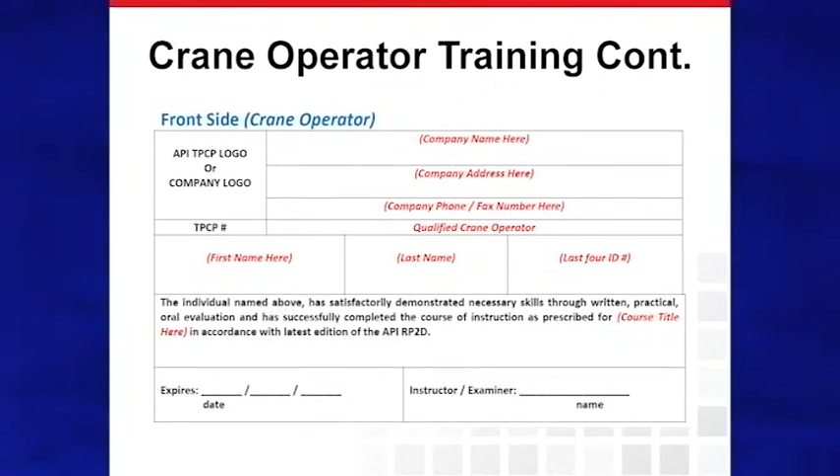So here's the front side of the crane operator card. Again, it was just the company logo in the left-hand corner - that was a misprint on that, so it'll just be company logo and this information. There's the back side of the card. As you can see, we wrote no history of disabling medical condition - they would actually have to check that off, and any corrective lens required. So that was another deal.

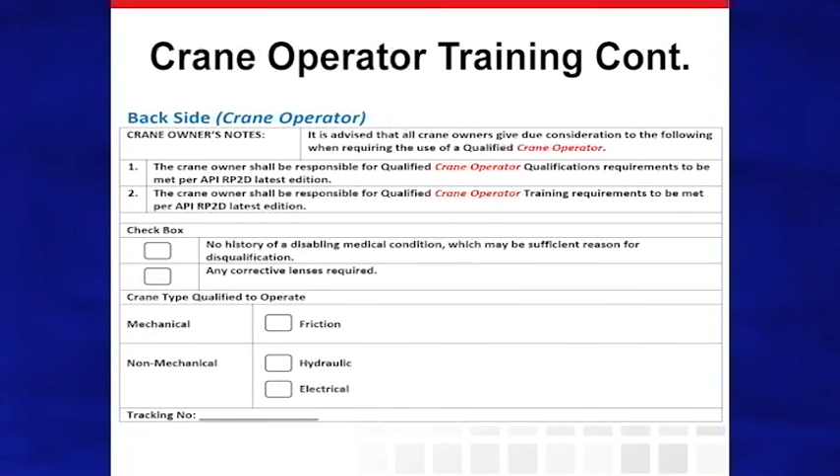And then the type of crane you're qualified to operate, you would either be friction, which is mechanical, or non-mechanical, hydraulic or electrical. And we put a tracking number in case somebody wanted to track it. Inspector training.

Inspector training was another major piece of the puzzle because it was very short, probably a 1 page section in the 6th edition compared to what should be covered in the 7th edition. We got into a lot more detail on the qualified crane inspector, just like we did on the rigger and the crane operator. A qualified inspector is one who is designated by the employer who, by reason of appropriate experience and training, has successfully completed classroom type training on crane maintenance and troubleshooting, on hoist troubleshooting and overhaul, and on the structural aspects of offshore cranes, which gives knowledge of structurally critical components and critical inspection areas.

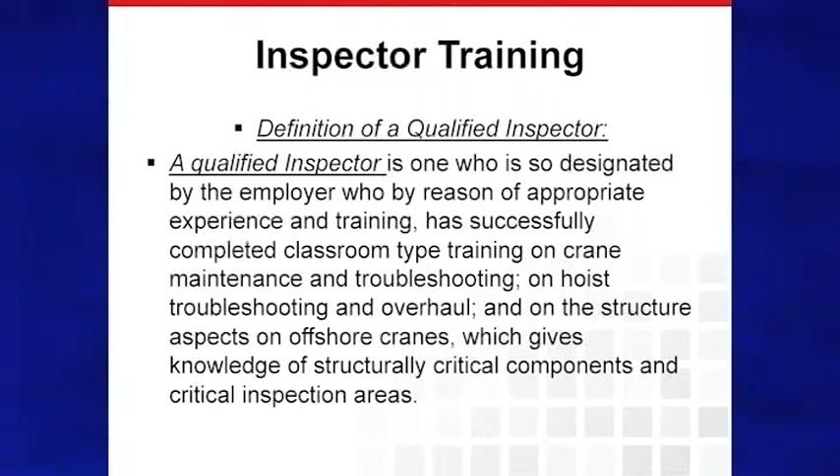Very heated topic, inspector qualifications. It is not a requirement for a qualified inspector to be a qualified operator. The 5th and 6th edition had this in it. We had several people who wanted to change that so the qualified inspector had to be a qualified crane operator, and the group decided we would leave it that a qualified inspector does not have to be a qualified crane operator. However, the qualified inspector cannot sit in the seat of the crane or operate the crane. So there are several drilling companies that were very adamant that they have qualified inspectors that they put a crane operator with to operate the crane while they're doing their inspections. So we left that alone - very heated topic, but we also left it that you didn't have to be a crane operator to be a crane inspector.

So it is recommended that the training elements for the inspector training program be tailored to the particular crane type in which the inspector is qualified.

Same deal if you're going to be operating or inspecting a mechanical crane, you should be trained on a mechanical crane. If you're going to be inspecting a hydraulic crane, you should be trained on a hydraulic crane. If you're going to be inspecting an electrical crane, you should be trained specifically on an electrical crane. That's a major change from before, because if somebody went through a qualified crane inspector course per the 6th edition, it covered all types of cranes according to API.

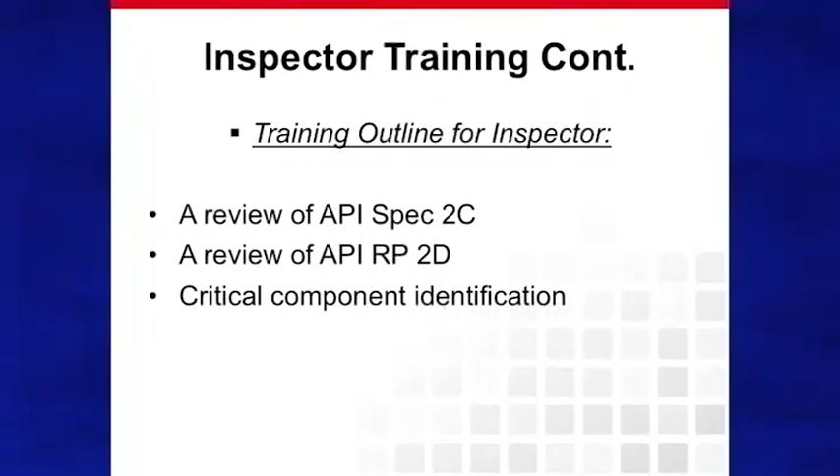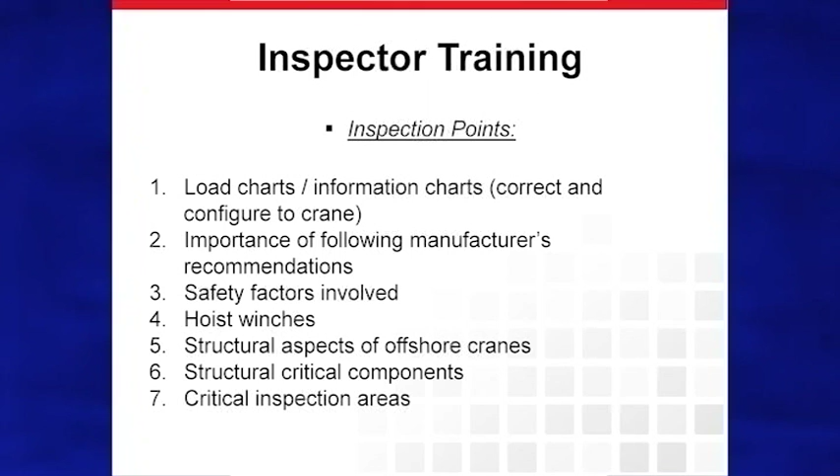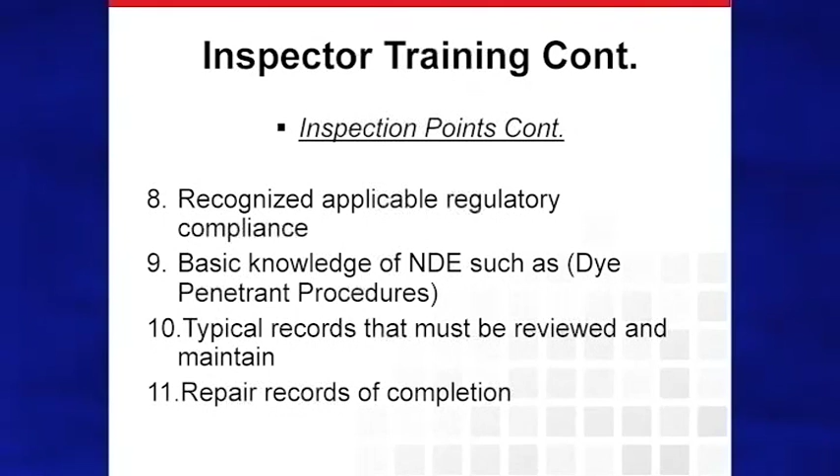Critical component identification, load charts and information charts, checking them to make sure they're configured to the crane correctly. Importance of following manufacturer's recommendations, safety factors, hoist winches, structural aspects of offshore cranes, structural critical components, and critical inspection areas. Recognizing applicable regulatory compliance, basic knowledge of NDE, typical records that must be reviewed and maintained, and repair records of completion.

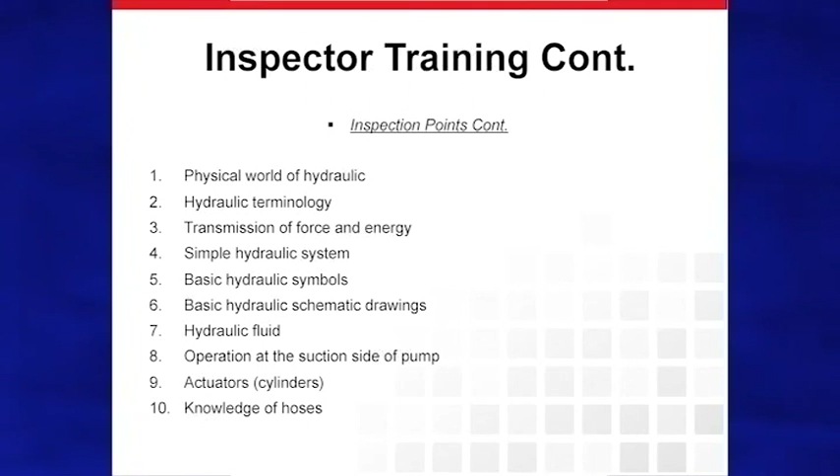The physical world of hydraulics: hydraulic terminology, transmission of force and energy, simple hydraulic systems, basic hydraulic symbols, basic hydraulic schematic drawings, hydraulic fluid operation at the suction side of the pump, actuators, and knowledge of hoses. Again, this is all added information that was not in the 6th edition.

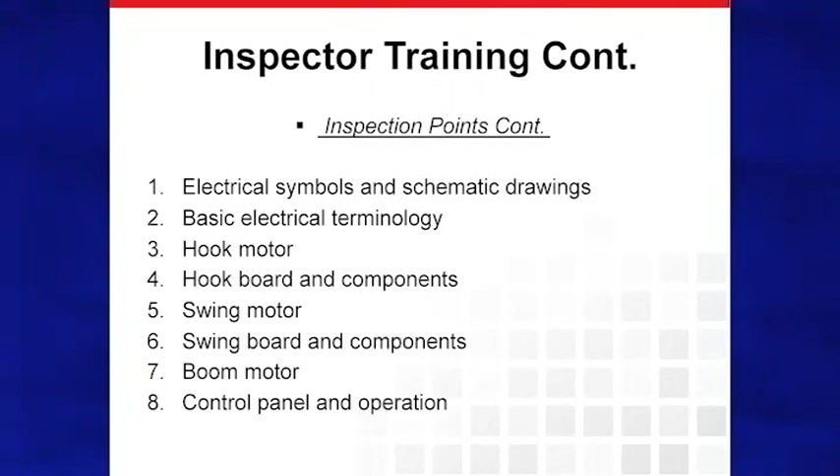Swing lock and brake, vertical swing shaft - this is some mechanical stuff - upper and lower reduction shafts, planetary and planetary brakes, clutch assemblies, front and rear drum brakes, boom hoist pawl, boom hoist brake, chain case pump, speedomatic, bearing, gear, shaft and housing inspection. Minimal practical exercises covering mechanical and non-mechanical types of swing assemblies typically used on pedestal-mounted cranes, emergency load lowering, crane safety systems, and wire rope.

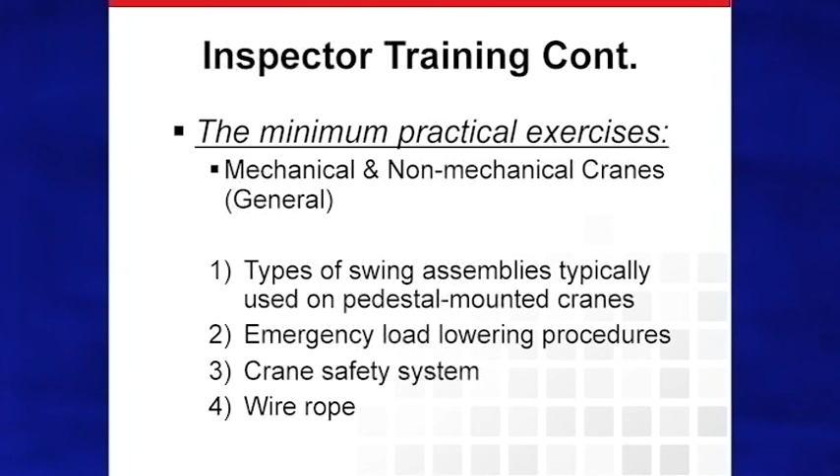Those were all the added information, and the same applies for crane inspector training. Again, you would have the information to follow to be able to get a crane inspector card.

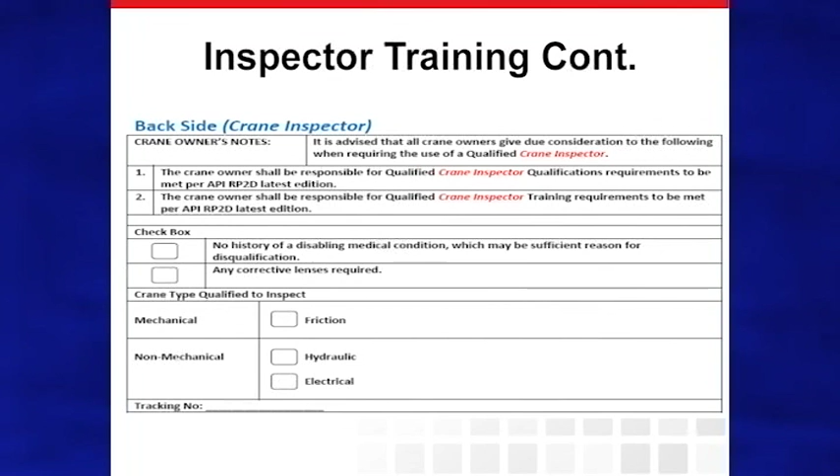This would be the front side, and this would be the back side of the crane inspector card. The corrective lenses field is on there, but it's not particularly necessary because you don't have to be a crane operator to be a crane inspector. So, that's it.

So I'll be available for questions afterwards.

Presenting on API U's training requirements for API RP2D is Caroline Loba, Training Associate for the American Petroleum Institute.

This leads me to the current RP2D course requirements for API U. As of July 1st, 2015, we are now requiring 2 days for rigger and 2 days for crane operator training, which breaks down to 1 day classroom and 1 day hands-on. Recently, I've been asked why we've increased the requirement to 2 days.

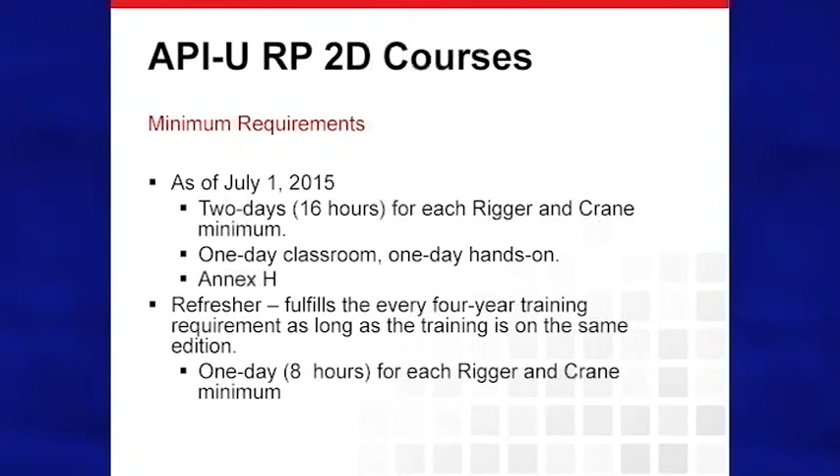With the amount of information published in Annex H in the 7th edition, as well as the final recommendation from the last TPCP committee meeting to change from 8 hours to 16 hours for both crane and rigger, we felt that increasing the requirement would benefit the industry, as we're finding there is room for improvement. However, we are also going to allow a 1 day, 8 hour refresher course. This would fulfill the every-4-year training requirement as long as the training is on the same edition.

For the future of API U and RP2D, as a response to feedback we received regarding the requirements, the training department and standards department at API will be working together, and we're going to assemble a task force. We're going to take Annex H and work on a document for training requirements. While Annex H is a great resource, we feel this might need to be a separate document. The specifics aren't finalized, but we would like to gather a group for this by September 1st. If you're interested in joining this group, please see me after the session.

We now move on to our question and answer session.

I see in one of the PowerPoint slides you're referring to the 3rd edition for temporary cranes. Is that the cutoff? This discussion went on for the full 4 years for temporary cranes, with people very adamant it should meet the latest edition of 2C, or adamant it should be somewhere in the middle. We chose 3rd edition as a minimum because it was in effect in 1995 and included the static and dynamic load charts, lifting capacity, and safety systems for anti-two-blocks and high boom angle. That's basically why we came to that decision. Now they can meet later editions, 4th, 5th, 6th, 7th if they have them, but we couldn't see forcing all temporary cranes to meet the latest 7th edition of 2C.

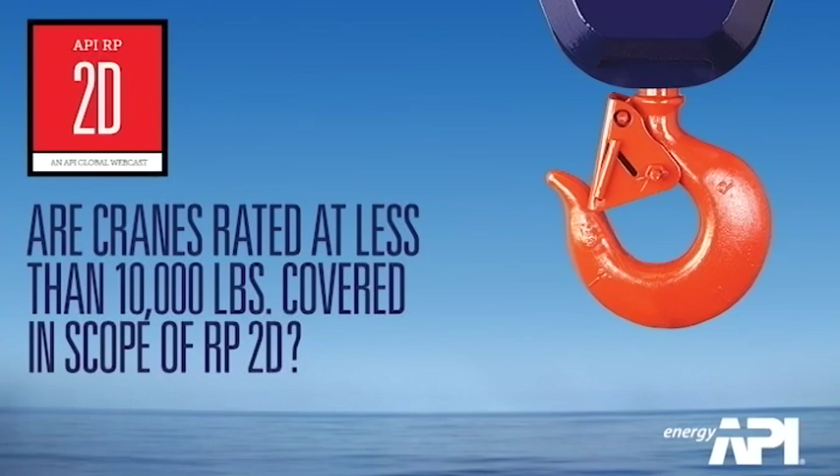Is the standard applicable to that crane? For example, if we have a crane by definition of the 7th edition with a working load limit of less than 10,000 pounds, would it apply? That's a vessel-mounted crane, basically a crane on a vessel, not a platform.

Okay, I sent some clarification, thank you. One other thing you guys want to pay special attention to with the 7th edition being adopted is what JR said about idle cranes. There's a lot of people in production with idle cranes that do just annual inspections. It pretty well states that if it sits for 3 months, you'll need to do a monthly inspection. So currently that's not the case.

One other thing that was real important, that we argued about for 4 years, was cable. As an operator, you must have a cable policy in place—meaning if you don't have a crane maintenance program, you need to get one, and if you do have one, you need to add a cable policy. We argued from 1 year to 3 years to 4 years, and agreed not to put a year policy in. So that was important as well.

Is that part of all the wire rope changes? I know there was a lot added around the maintenance section. Yeah, that's the section JR wrote, where the crane owner will determine a crane or wire rope policy, so you need to make sure you have one. We avoided putting down a date for when you have to replace the wire rope, or what intervals—it's up to the owner to make that determination, or on condition. Basically he can have one and put down that he wants to change it on condition, but that should be his policy, whatever it states.